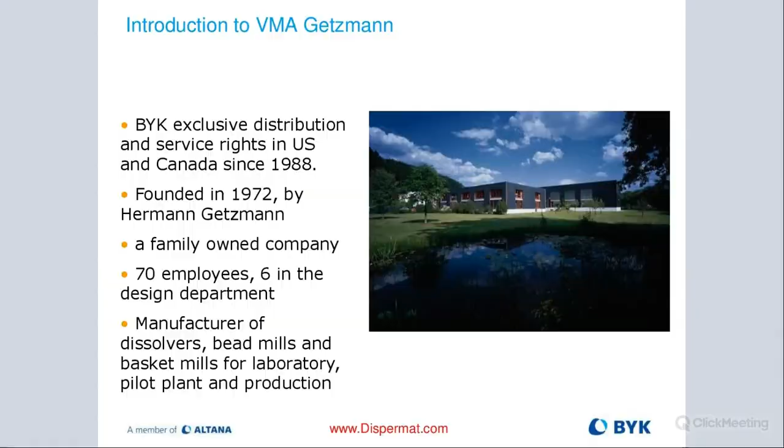But they are known as a high-end manufacturer of dissolvers, bead mills, basket mills for lab, pilot, as well as production. And about 5 years ago, we started offering production capability here in North America, and it's very successful. People really like the flexibility and adaptability of the equipment. So it's a worldwide company. They are represented in about 65 countries all over the world.

They are known as innovative. About 40% of everything that VMA-Getzmann makes or builds is custom. So there's a lot of new, we call them end-use markets, for example, battery or fuel cell, that require custom design. You know, some people like argon gas or nitrogen blankets. So with that, they can accommodate that in their design process. And a lot of the equipment that is made today is actually customer specific or application specific.

That's one of the strengths of the company, being really flexible to customer requirements. The idea behind the product offering was to create a solution not only for lab, but also make that scalable for pilot as well as production. When you want scalable equipment, you need the right software, and you have to be able to come up with numbers that make sense and are scalable. That's one of the strengths behind VMA-Getzmann.

We also have laboratory capabilities in Germany at VMA. You can see the picture at the end. We also have a lab at our sister company, BYK-Additives, in Wallingford. That's also an important point we want to stress.

We welcome people that have applications they want to take a closer look at with the equipment. We want to invite you up to our lab at BYK-Additives in Connecticut and try out your product on our Dispermats and show you the results. We're also able to tie in some of the chemists on the additive side that help with formulation improvement and so on. So we don't want to just come across as a company that sells hardware or dispersion equipment, but also provide the entire solution, meaning also the additive support, which is very important as part of the overall package. We're the only company that really brings that to the table.

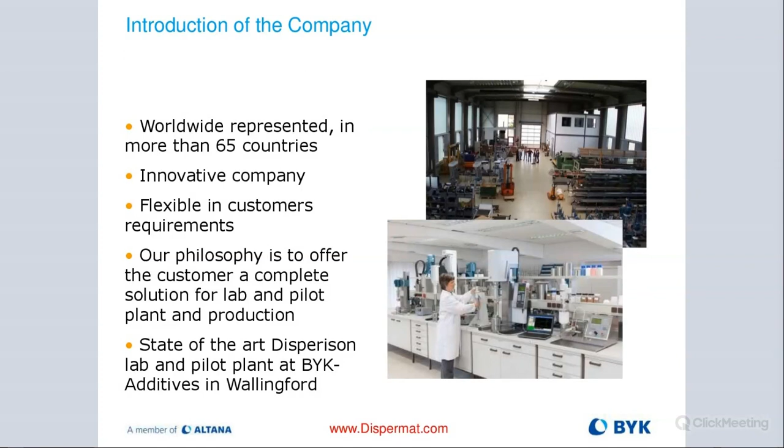And we now have an exclusive relationship with VMA for North America for the last 30 years. We're the exclusive distributor. We manage everything from the sales point of view, as well as service, maintenance, and repair of the equipment, everything stateside. So lab, pilot, plant - very important for people to remember that we cover everything.

When we talk about the dispersion process, it's really important to understand what we're actually doing. When you look at this picture, you see on the bottom these larger building blocks - particles that are fused together by invisible van der Waals forces. They're like electromagnetic forces that are basically binding these primary particles together. These large clusters we call agglomerates. What we want to do when we disperse is break up the binding forces that hold these aggregates together, or primary particles and aggregates, and turn them into these smaller pieces from the larger blocks.

The way we go about doing that is by using a dissolver. So when we go from the agglomerate level down to the aggregate level, we do not use a media mill. We actually use a disperser, a dissolver with a Cowles blade, or an impeller blade as some people call it, or a disc with teeth as others refer to it. That will give us enough shear force to really break up the binding forces and turn these agglomerates down to aggregates. That's what we'll primarily talk about today.

When we talk about taking the aggregates and turning them into primary particle size, this is actually the second part of our dispersion process - the milling, or fine grinding, or fine dispersing - where we use a media mill, like a basket mill, a horizontal mill, or a vertical bead mill, or three-roll mills, as some people are familiar with, which we don't offer for a number of reasons. Basically, that's when you go from the aggregate level down to primary particle size.

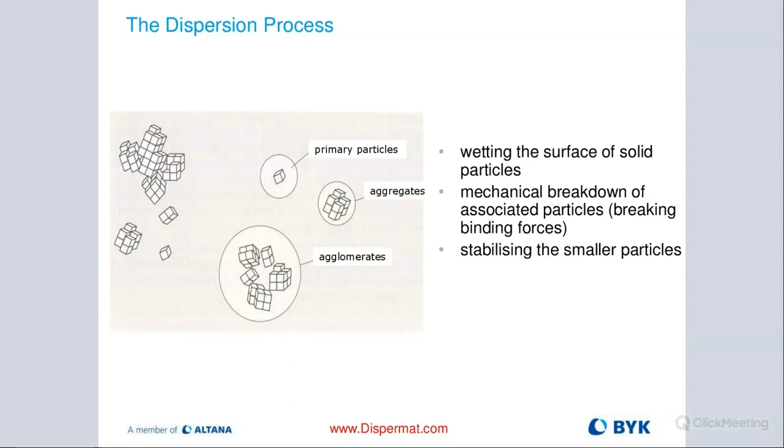So the first step is also using the dissolver. We're not only breaking up the van der Waals forces, we're also wetting the surface of solid particles. It really is a mechanical breakdown of these associated particles. What's really critical is that we always keep in mind that we have to stabilize these smaller particles when they're in a suspended state so they don't reagglomerate. For that, we also have to use different types of dispersants depending on the end use. BYK-Additives has a big selection of those, and they can be very helpful with giving advice on selecting the right dispersant or other types of additives that go in - a defoamer would also be one of them that might be needed.

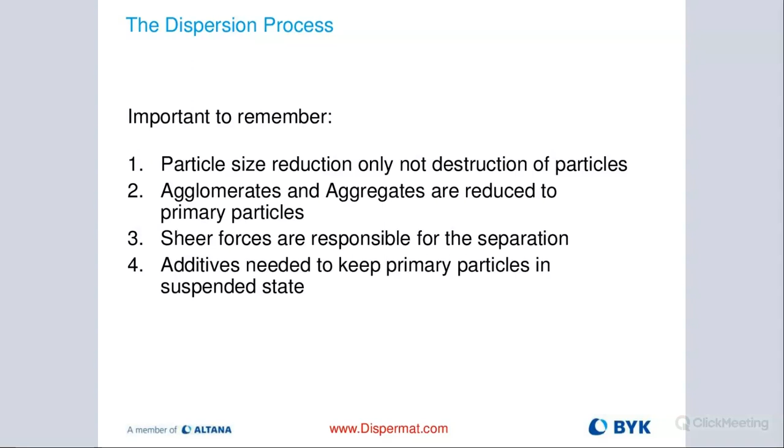It's really critical to remember that the dispersion process is not about destroying particles. It's particle size reduction by merely breaking up binding forces, turning these larger blocks into smaller blocks. Shear forces are responsible for that separation, nothing else. Then the right additive allows us to keep these reduced particles in a suspended state.

What's very critical here is the correct tip speed. Some people call and ask, what's the RPM on the machine? How high do I have to turn it up? We always tell customers, it is not about the RPM. Yes, RPMs are important, but it's about the tip speed, which is the actual speed of your blade.

Depending on the size of your disperser, the large production scale dispersers don't run at very high speeds. They can go up to about 3,000 RPMs. A lab dissolver can go up to 20,000 RPMs. Yet when I attach the correct blade size, the tip speed should be identical. That is important when you upscale.

We want to remember that the correct, or optimum, tip speed window is 18 to 25 meters per second. That is a window that allows us to properly pre-disperse and break up the binding forces, turning these larger agglomerates down to the aggregate level when we maintain 18 to 25 meters per second.

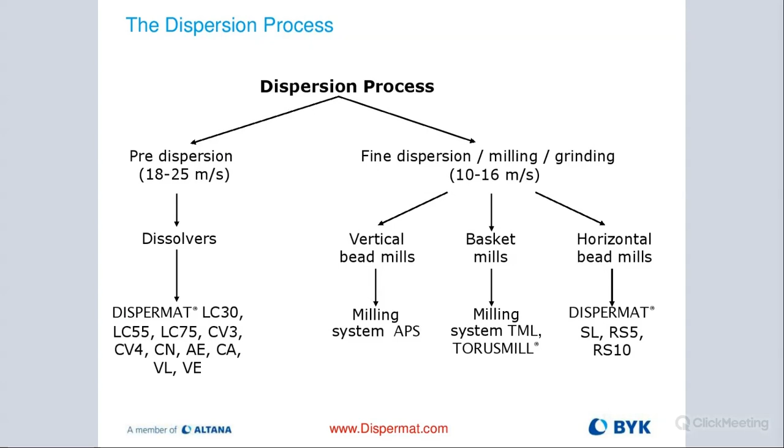Another critical element when starting the pre-dispersing process is always selecting the right diameter blade, and that really depends on the volume of product. In a nutshell, we are always aiming for about 50% loading in our container. We can go up to about 70% and as low as 40%, but 50% is the optimum.

If we go higher than 70%, you risk spilling the material if you increase the tip speed. If you're below 40%, it's more difficult to oscillate and find a really good sweet spot. So 50% is ideal. Then we want to aim for about 1/3 the diameter of our blade versus the diameter of our vessel—that's where we start. Of course, we can increase or decrease the blade diameter, but that's the optimum ratio.

Now, if you look on the right side at that table, it basically tells you there is not one blade that fits everything for every container. Let's take a one quart, about 1,000 milliliter, container. You can see that the range for blades can go as low as 30, but all the way up to 70, depending on the viscosity of my material.

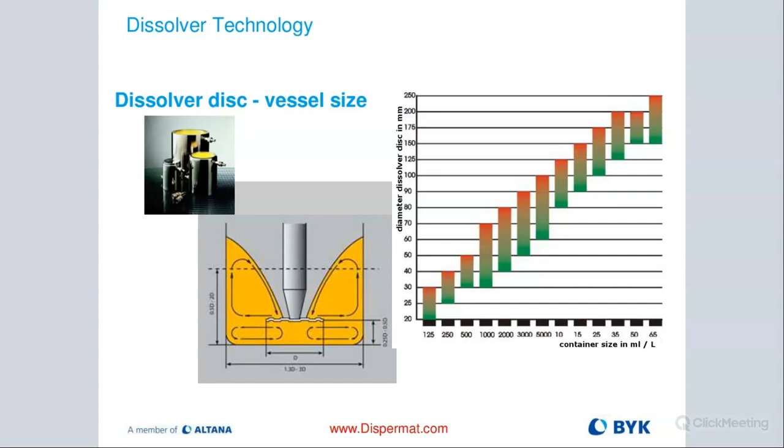Another very important point, as I mentioned earlier, is tip speed. 18 to 25 meters per second is optimum when pre-dispersing, and 10 to 16 meters per second rotor speed when milling. We can calculate the tip speed.

This formula is really important. It lets you calculate tip speed based on your RPM and the diameter of your milling disc. It's pi times the diameter of the milling disc times the RPM, which gives you the tip speed. To get meters per second, divide that formula by 60, expressing the diameter D in meters. So for example, with a 50 millimeter blade, you'd multiply 0.05 times the RPMs times pi, then divide everything by 60. That gives you the value in meters per second, where you want to aim for 18 to 25.

Some of the higher-end models, like the dispermats with C technology, will calculate that tip speed for you automatically. But this is one of the most important formulas when dispersing - it's not just about how fast, what RPM you're running, but the actual peripheral velocity or tip speed of the blade.

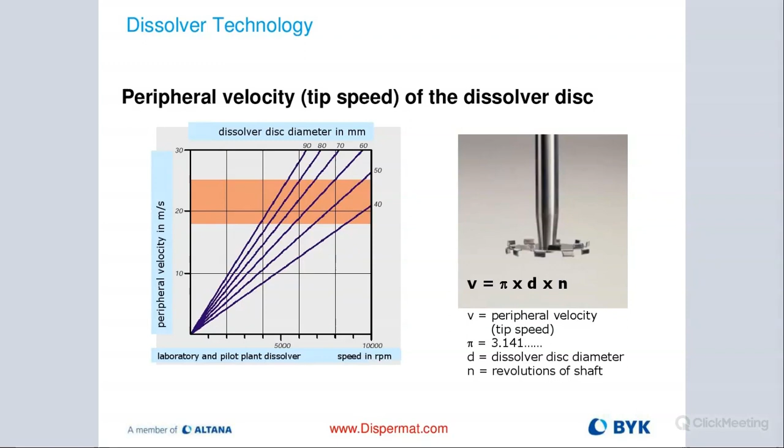Then there's something else to watch for when pre-dispersing: the donut effect, literally called that. It's a visual cue. When I look inside my container with optimized tip speed, running at a good viscosity for dispersing - let's say 2 to 5,000 centipoise is a real sweet spot - I'm able to put in a good amount of energy. I should see the formation of a donut as I adjust my tip speed into that optimum window of 18 to 25 meters per second. Part of my blade becomes exposed, and I see the donut forming around the edges of the blade. That gives me the visual cue that pre-dispersing looks good, so I maintain that donut for about 15 to 30 minutes. If done correctly, we should reduce particle size to anywhere between 10 to 30 microns - that's where we want to be before starting the milling process.

We can't really get smaller than 10 microns - it's very difficult using just a cowles blade. It would take a very long time and for most products it's just not possible, because we can't put in enough energy with a cowles blade with teeth alone. So to go smaller than 10 microns, I need to do media milling or grinding with media. Here you can see the deagglomeration, the breakup of these binding forces, happens exactly at the point where the teeth are located.

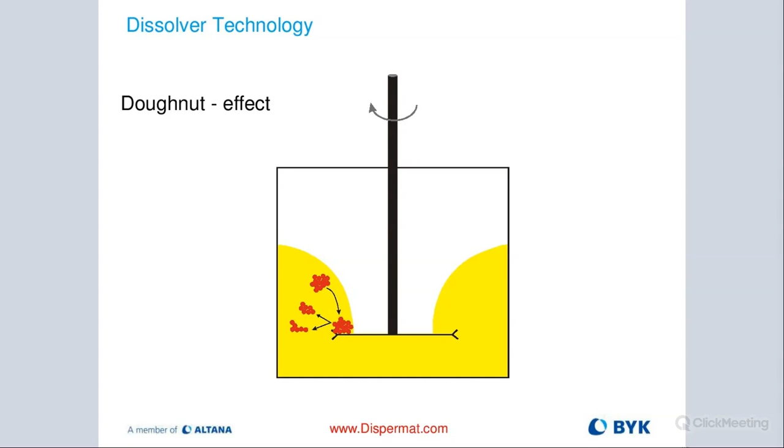And there's also the deagglomeration that takes place on the bottom of my blade. You can't really see it on this picture. I forgot to put it on there, but it actually is also part of the deagglomeration. It goes on below my blade. I'm also dispersing there as well. But it's really right around the edges of my blade where that happens.

So if you look at this picture, that is actually a donut. As I described it earlier, you can see the blade exposed kind of in the center. You're looking at a really good optimum dissolver batch with the right tip speed, 21 meters per second, and we're putting in about 850 watts of energy. So that tells me that I optimize the tip speed, I have the right blade diameter, the blade position is correct, and I'm actually seeing a really nice looking donut.

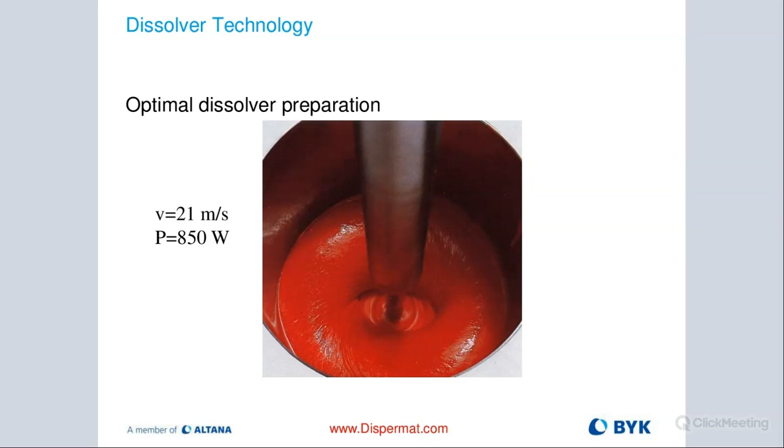Now, it can so happen that I still run at 21 meters per second, but here is a problem. I'm only able to put in 320 watts of energy. And our Dispermats, some models will actually show you what is the amount of energy that you're putting into the mill base. Well, what's happening here? Probably is that my viscosity is very low and I have a very small blade. So therefore, I'm not able to put in a lot of energy into my mill base. So I'm also not able to see a really nice donut because the donut would collapse as soon as it's formed because of my viscosity.

So I'm dealing probably with something below 1,000 centipoise. My blade diameter is very small, and I'm able to maybe pre-disperse, but it would probably take me quite a bit longer to do the particle size reduction. And I may want to either get a larger blade diameter to put in more energy, or I may want to tweak my formulation to see how I can increase the viscosity a little bit. That will also allow me to put in more energy.

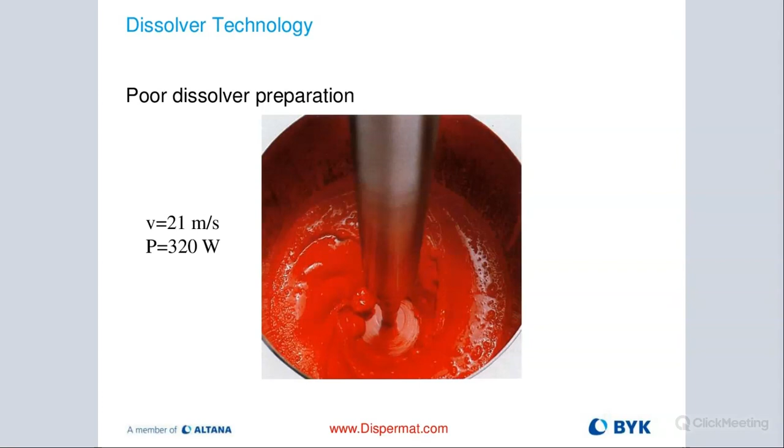And then we have another scenario where, for example, we don't have a donut effect at all, but we're putting in a lot of energy and we're running also 21 meters per second. So here, what that means is we don't have a donut effect because my material is so viscous that it just wouldn't create a donut. But I'm able to put in a good amount of energy, so I know I'm pre-dispersing. So what you can do is maybe change the diameter of your blade, which I don't think is needed because you're putting in 900 watts of energy. Maybe what you could do is reduce the viscosity somewhat of your material to make the flow characteristic, the rheology, a little bit better, so that you would be able to see a donut.

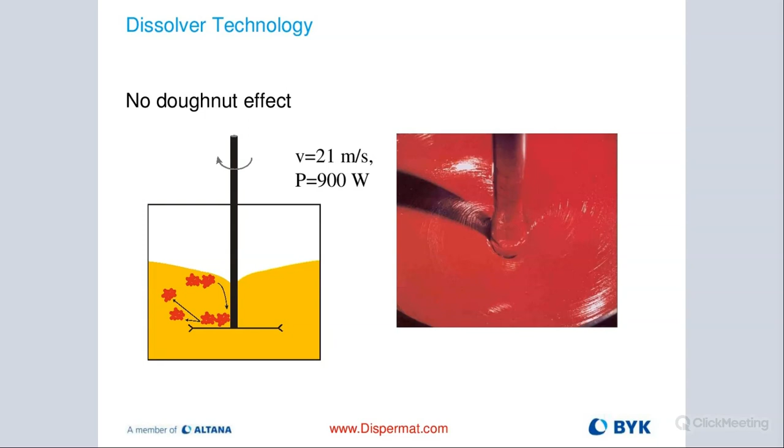But other than that, if you reduce the viscosity, some of these materials can be very thixotropic. And then it happens that the material could sit around the edge of the container wall or even cling to the container wall. So by modifying the formulation, you may be able to move more of the product off the container wall, and get a better homogenization or dispersion as a result of it. So that could be something to look at from a formulation standpoint. But it doesn't mean that you're not putting in enough energy or that you're not pre-dispersing just because you don't get a donut effect. So there's different ways that you can look at that, but that is an example of why you wouldn't have a donut.

Okay, so this is again very important: the dispersion duration, again, 15 to about 30 minutes. The donut effect, ideal. It's not always a must, as you just saw in some of these examples, but it's a visual cue. If you have it, you know, hey, I'm doing something right. Tip speed, again, can't stress that enough, 18 to 25 meters per second. Geometric consideration, always: blade diameter to my vessel diameter. Again, 1/3 is where we kind of start out. And then we can go either up or down depending on the formulation and the viscosity of our batch.

There's many different types of impeller discs, and even now some of these newer end-use markets don't allow any type of metal or steel. So we have impeller discs that are coated with ceramic, for example, silicon carbide or zirconium oxide. So there could be a number of different ways of coating these impeller discs or Cowles blades, or even designing them for very specific applications. So we can also do custom design of these impeller discs.

The amount of mill base, again, 50% is ideal. Pigment filler concentration, always important to keep that in check. Temperature, again, we try to be as low as possible. Cooling, always important, especially when we move over to a media mill attachment. We want to make sure that we don't have to swap out containers, and we can do everything in the same container. So jacketed vessels have a big advantage because they allow us to properly maintain a certain temperature.

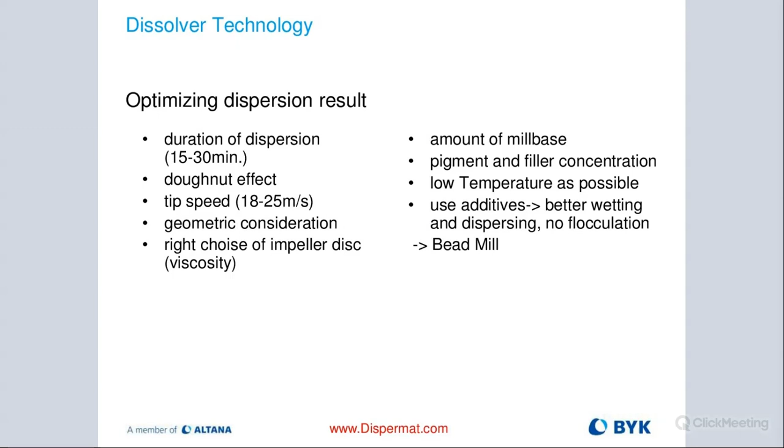And then again, the additives are critical to give us better wetting, dispersing, and no flocculation post dispersing and milling. And then once we achieve everything, we should be able to be between 10 to 30 microns of particle size. And that's when we then move over to the second part, which is the milling process, which we'll talk about in a few weeks. So here, just a quick overview of some of the different technologies.

So we have simple lab dissolvers. What you're looking at is the brand new CV3 Evo. We're going to release that in April. It's a beautiful lab machine. Great thing is it's got upscale software. It allows you to really precisely scale that up from lab to pilot to manufacturing.

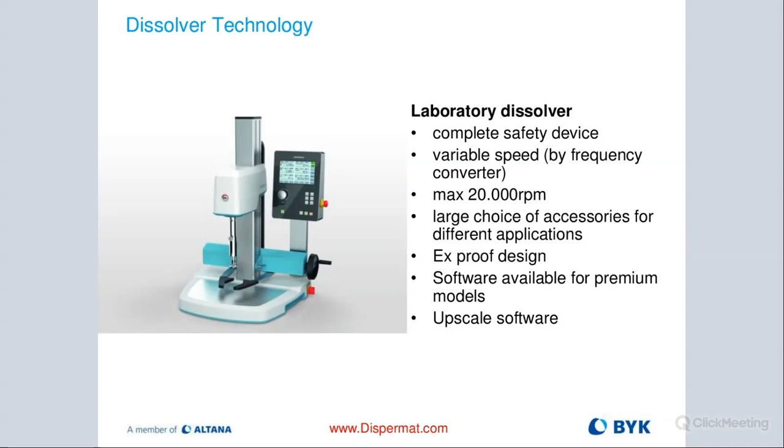Maximum RPM 20,000. We are able to attach many different accessories on here, different blades, obviously, it comes with a set of blades, but we're able to attach bead mills, basket mills, rotor stator vacuum systems. So all the things will be able to fit onto the device. And also that's true with all of our other Dispermats. They are functioning also as homogenizers, emulsifiers, and of course as dispersers. But these are all different attachments that you could purchase and put onto a Dispermat to work for many different applications.

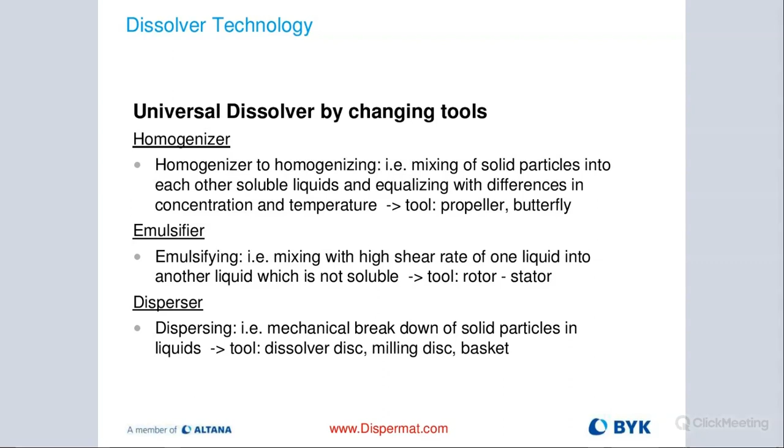Here is a good picture just showing you, this is actually an AE model right there, kind of our flagship Dispermat for upscale and lab applications. On top left, you can see a rotor stator attachment, a vacuum system on the top right, the basket mill attachment on the bottom right. Then we have a wall scraping unit and also a vertical bead mill on the bottom left that can be attached to the same machine, making this a very versatile piece of equipment.

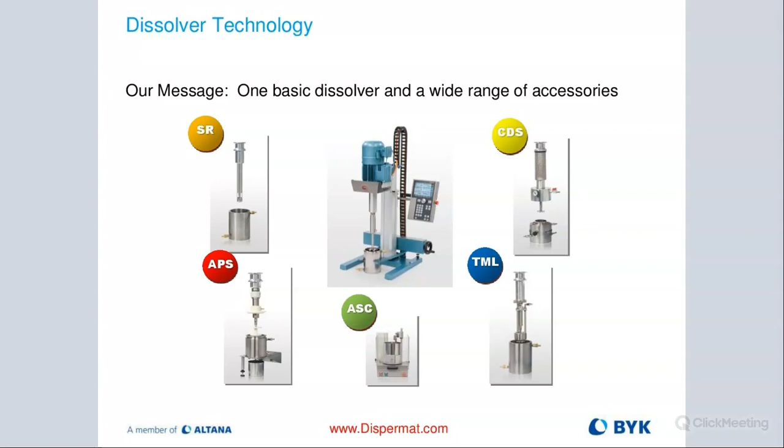And that's kind of going back to that design philosophy that we spoke about earlier that Mr. Getzmann had in mind when he started this company. There's a big advantage to that, is that when companies buy dispersers, they usually want to buy them for more than one project. So this allows them to cover a lot of the different applications, end-use markets, or products by just buying the different attachments.

So we have a very simple LC, very quick and easy, relatively inexpensive, low maintenance. All of our motors, doesn't matter what model you buy, LC or anything bigger, we use brushless step motor technology. I can't stress that enough. These motors are the best in the industry. There are no belts, there's nothing to grease, there's no maintenance on these motors. They are the quietest motors on the market. You can hardly hear them even at high speeds, and there's hardly any vibration.

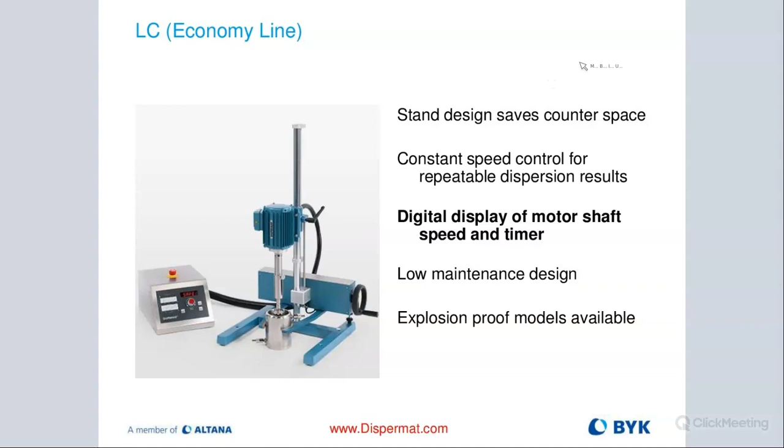So anybody that's ever used a Dispermat knows that, and they always point out how quiet these are, and they will never break. We have some Dispermats that are in use for almost 40 years now here in the US, and these Dispermats are still working correctly today on the same motor.

Then we have that new CV3 Evo that's coming out at the end of March, early April. There are going to be two versions. We're going to have a standard version and an advanced. The standard is going to be exactly what you see here, but the advanced will allow you to also store the data and port it over to a computer and be able to store batches by name. But more importantly, it also allows you to upscale very precisely from the lab to manufacturing.

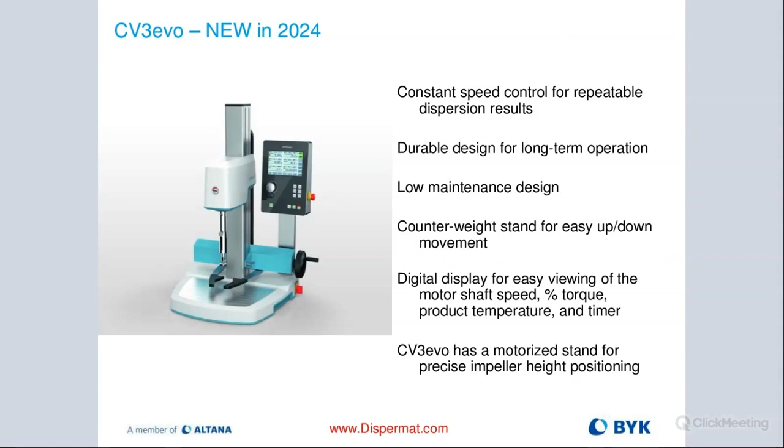Because I know exactly how much energy I will be using to do it with that constant power feature. And then the advanced model with the upscale capability also will come with a scale that sits right next to the disperser, and that will allow you to weigh everything, and whatever you're weighing will actually be displayed on the scale itself, and then you can store that. So it's important when you want to store batches and replicate them later on, that you have all that data available for good reproducibility from batch to batch.

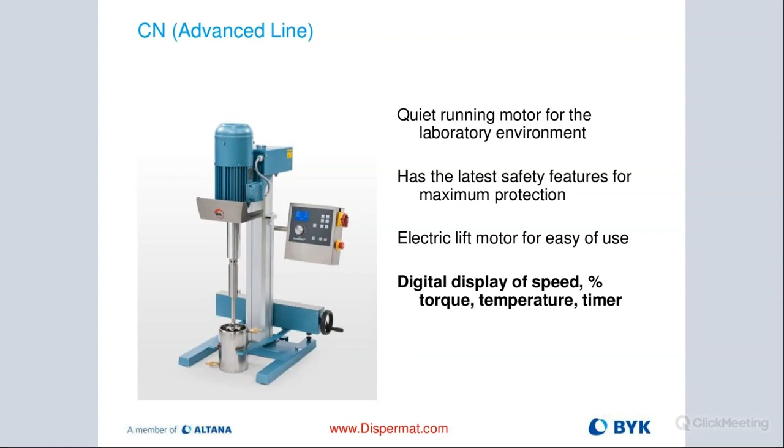Then we have a CN line, very popular here in the US. It's a great model. What's beautiful about it, it's very simple, gives you good information on the control panel, but it's also very scalable. We also have models that can go up to 150 liters within the same CN line for pilot, and then it's very easy to scale that up to manufacturing. That's what the control panel looks like.

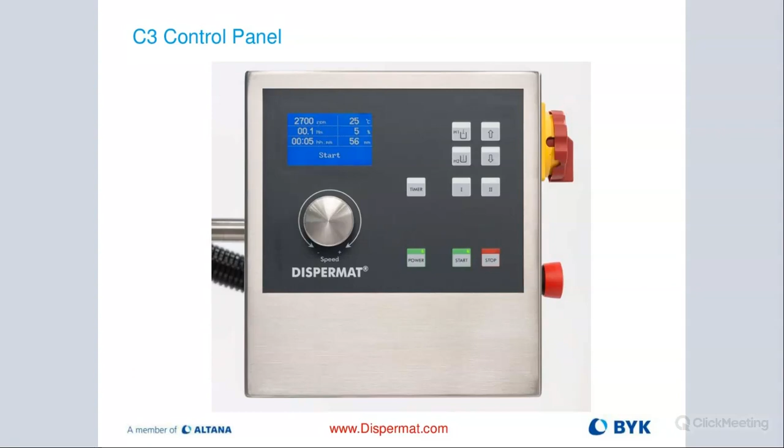So we have our speed, we have our torque value, which is an indirect measurement of viscosity. We have a timer function and temperature. It'll also show us the actual blade height inside of our mill base, which is also very important, because if it's an opaque finish, we don't always know where the blade is. By having that on the display, it'll show me exactly where my blade is. So that's the C technology.

That's the most advanced control panel that gives you speed, energy input, and a torque value. It'll also give you the tip speed on the top right. We spoke about that earlier. Temperature and timer function. All of our equipment has redundant safety features: the container clamping system and the working height area adjustment. That means you have to set an upper and a lower threshold depending on the container size, allowing you to operate the disperser when the blade is in between these two thresholds.

So nobody would be in danger of having a spinning blade outside of a container at 20,000 RPM. If you were to lift it up, the blade would stop at the top reference point that you would be setting, and the machine would just stop right there. So we wouldn't be allowed to go above that point and have a spinning blade outside of the container. And the bottom reference point will stop the blade from hitting the container bottom. So you have these two buttons right here, we call them H1 and H2, where you can digitally set those two reference points, the top and the bottom point in your container, for safe operation.

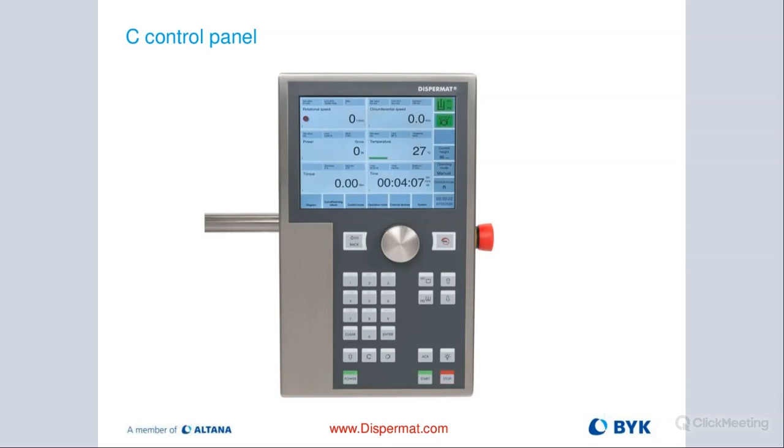And then we also have the container clamping system, ensuring that the container is always perfectly centered, clamped properly, and does not wiggle around. Only if your H1, H2 reference points are correctly set and your containers are clamped tight will these two fields light up green, allowing the operator to run the machine. If one of these is red, you cannot turn on the machine, it will not power on. So this is very important. It's all about safety, and we have seen people get injured or product flown around the lab. This should not happen with the safety features of these Dispermats.

Okay, and then we have the AE premium line for upscale, giving you all the features we just discussed with that net power, with that constant power. It's perfect for scale up. We can do a net power calibration, basically setting all the values to a zero point. When the machine runs without product, it would already use torque, or energy. So by doing a net power calibration, I would set all these values to a zero point. So when I'm running my product, the energy or the torque would only be related to my product and not the machine input. That's also important when I'm upscaling.

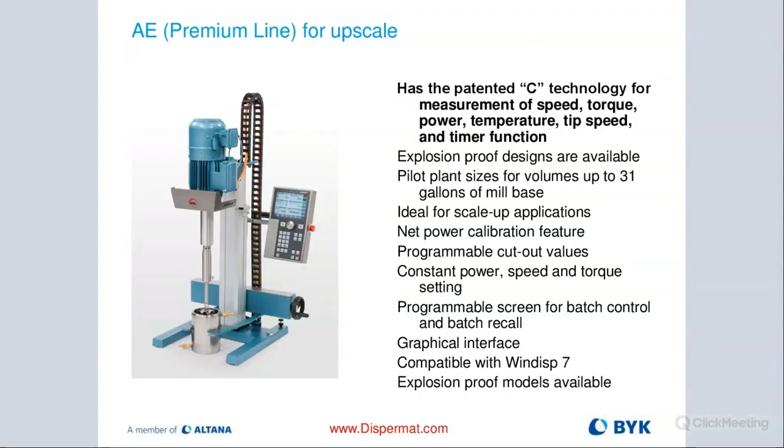And then again, you can store all the data and give batches a name or a product ID number, and then recall that at a later time. Really, really nice model for the lab and pilot. And then we also have that in manufacturing.

Just an example here in the US, we have a customer that bought 3 really nice Dispermats for dispersing. These are very viscous materials, some of them over 100,000 centipoise. So they have an integrated wall scraper system, and these are larger containers. This is actually the smallest production scale machine that we make. That's the SC115, but we also make them much bigger.

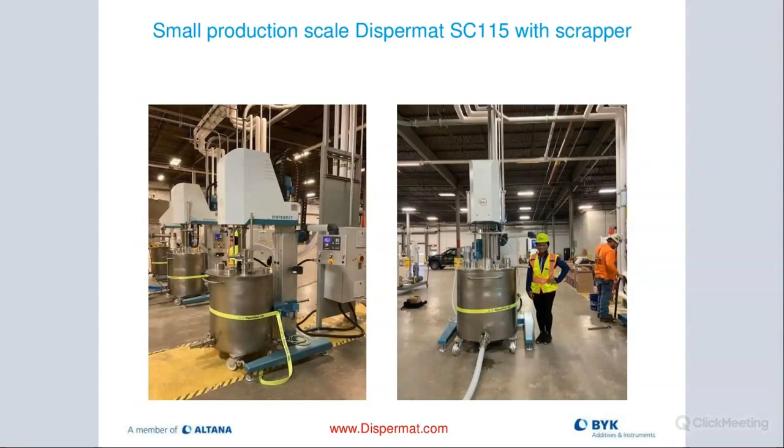But that's what the customer's requirements were. And then again, they can also be used as media mills by attaching a basket mill or homogenizer on them as well.

Okay, so that covers it for today. We went a little bit above the 25-minute window, but I think some of the critical parts needed to be talked about. Yep. Good stuff, Andy. Appreciate your expertise here.

Couple questions in here from Christian. How can you reduce the damage of effect pigments, aluminums, in dispersions? It's difficult. Obviously our sister company is Eckart, they use Dispermats, but it's a good question. And you always run into this problem when you're dealing with effect pigments, because you don't want to destroy them. You actually want to kind of blend them.

So basically, the recommendation there is you really have to dial back the amount of energy you're putting in, the speed. We have some customers that actually use a propeller blade instead of a Cowles blade, so the teeth don't damage the dispersion or the aluminum effect pigment. But it's very important. If you damage the aluminum effect pigment, then it's pointless, right? And you're not going to have a good looking product.

The point of dispersing is also that I have good color development, good gloss, good appearance of my material. And if I damage my effect pigment, I don't have proper alignment of my effect flake, therefore giving me diminished appearance, if you want to call it that, or some other side effects based on improperly dispersing. I hope that answered the question. Christian, if you'd like to elaborate, just drop it in the chat here.